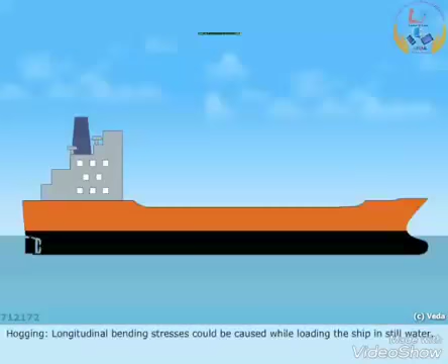Hogging. Longitudinal bending stresses could be caused while loading the ship in still water. Hogging is a stress that causes the ship's hull or keel to bend upwards at amidships.

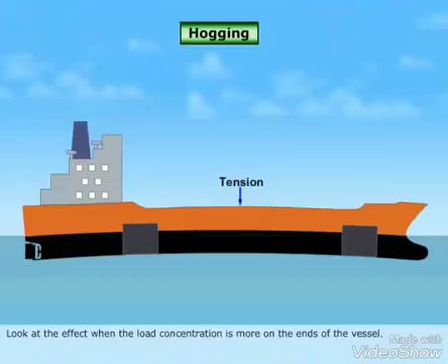Look at the effect when the load concentration is more on the ends of the vessel. The ship structure bends downwards at the end. Sagging: when load concentration is more at the center, the structure tends to bend downwards in the middle. This action is called sagging.

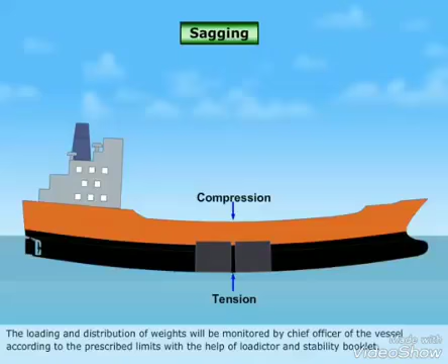The vessel is designed with certain allowable maximum bending moment and shear forces which are tabulated in the approved ship stability booklet. The loading and distribution of weights will be monitored by the Chief Officer of the vessel according to the prescribed limits, with the help of the loadicator and stability booklet. He is responsible for minimizing this sag and hog of the vessel.

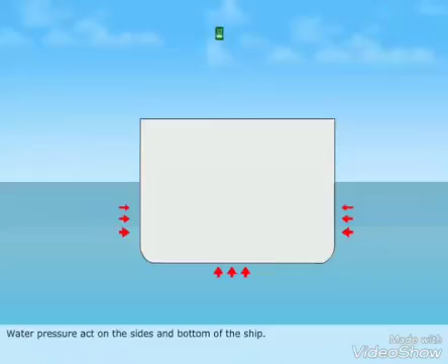Water pressure acts on the sides and bottom of the ship. If the ship's sides are not strengthened, it will tend to bend inwards as shown.

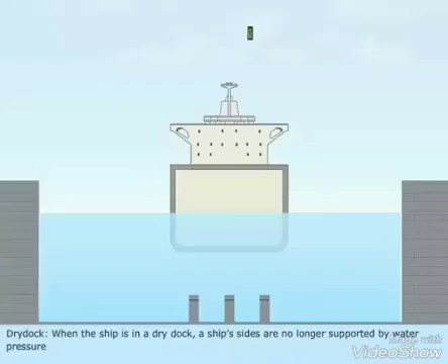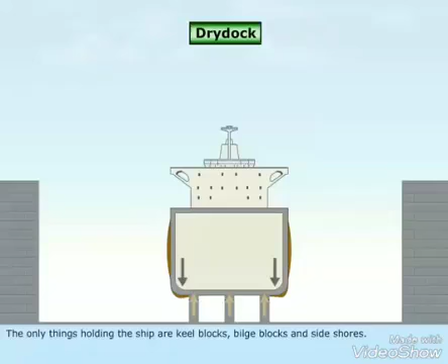Dry dock: when the ship is in a dry dock, the ship's sides are no longer supported by water pressure. The only things holding the ship are keel blocks, bilge blocks, and side shores. The result is that the sides of the ship tend to bulge outwards and the bottom tends to sag. To counteract dry docking stress, the entire bottom of a ship is strengthened.

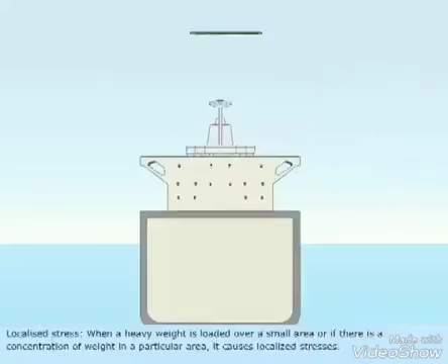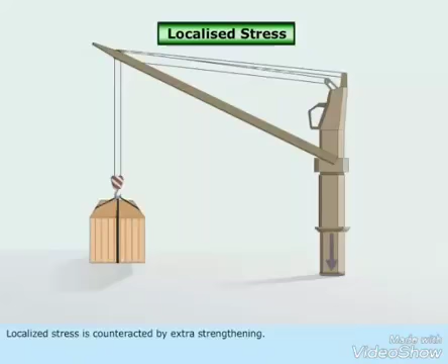Localized stress: when a heavy weight is loaded over a small area, or if there is a concentration of weight in a particular area, it causes localized stresses. Localized stress is counteracted by extra strengthening.

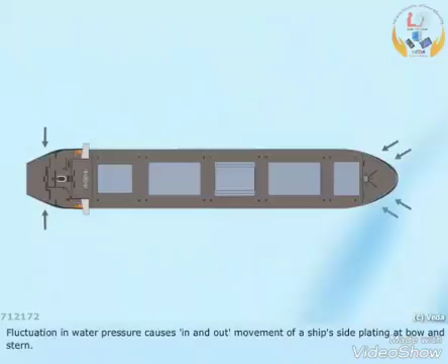Fluctuation in water pressure causes in and out movement of a ship's side plating at bow and stern. This movement results in panting stress. It is more pronounced at the bow, which pushes the bow ahead into the water or swell.

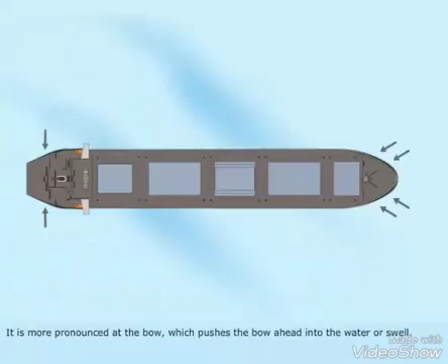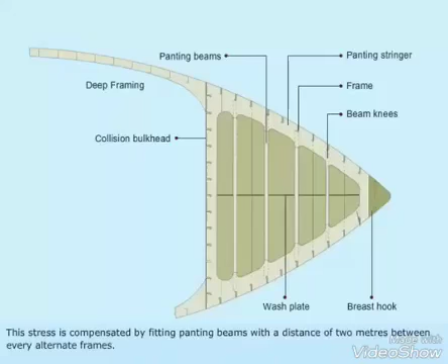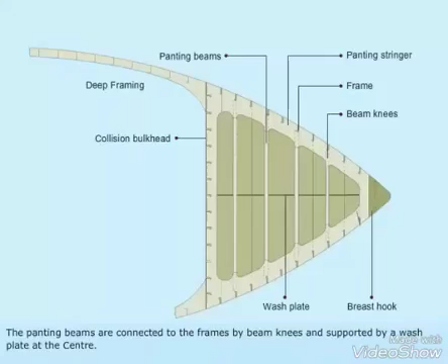This stress is compensated by fitting panting beams with a distance of 2 meters between every alternate frame. The panting beams are connected to the frames by beam knees and supported by a wash plate at the center. Side stringers in line with panting stringers are fitted throughout this deep framing region. Breast hooks are fitted to support the radiused stem plate and to prevent in and out movement of the side shell.

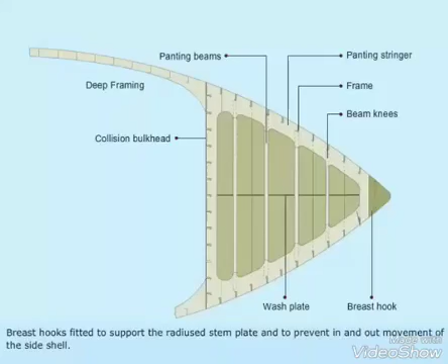Pounding. Pounding stress occurs at the bottom plating of a ship near the bow during excessive pitching. To compensate for slamming of the ship's bottom, outer bottom plating is thickened and connections to the inner shell and inner bottom girder are strengthened.

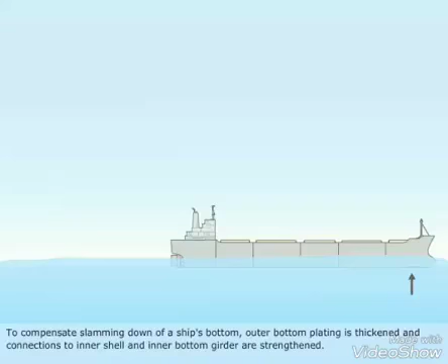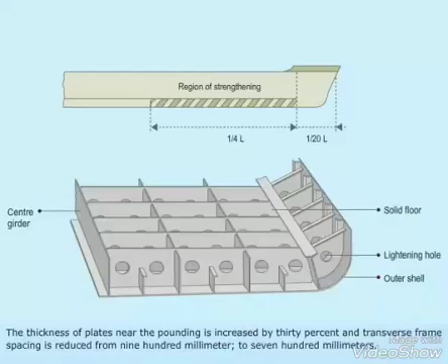The thickness of plates near the pounding area is increased by 30% and transverse frame spacing is reduced from 900 mm to 700 mm. Solid floors fitted at every frame space are welded to the bottom shell, and transverse floors are fitted at alternate frames.

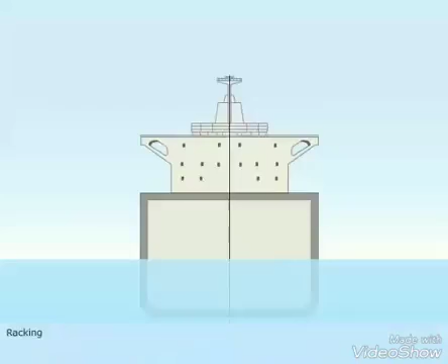Racking. When a ship rolls in a seaway, there is a tendency for the ship's side to get deformed. This deformation is caused when the deck moves laterally relative to the bottom structure. This in turn causes the side shells to move vertically relative to each other. Such a deformation is called racking stress.

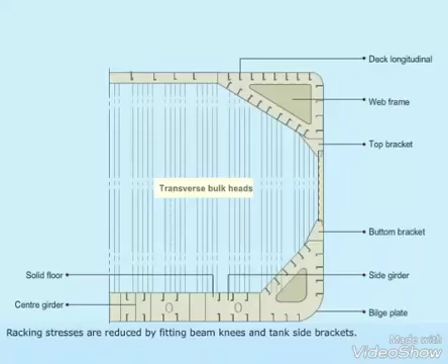This stress is more pronounced on the corners of the ship due to wave action on the hull. Racking stresses are reduced by fitting beam knees and tank side brackets. But the most effective way to resist racking is to fit transverse bulkheads.